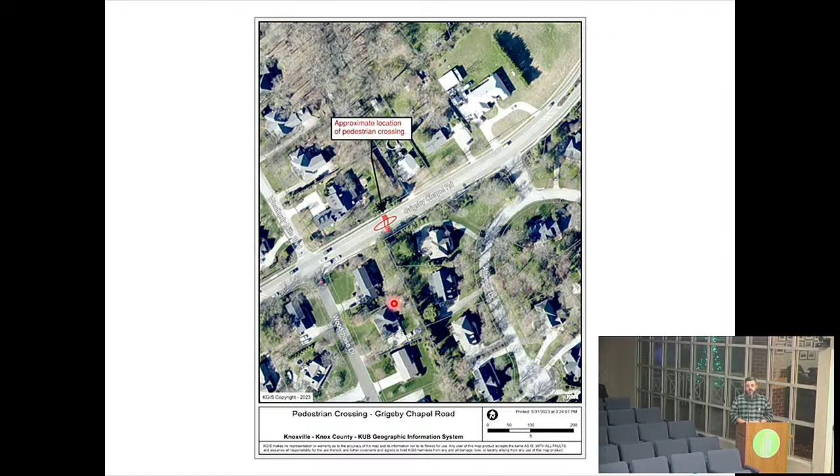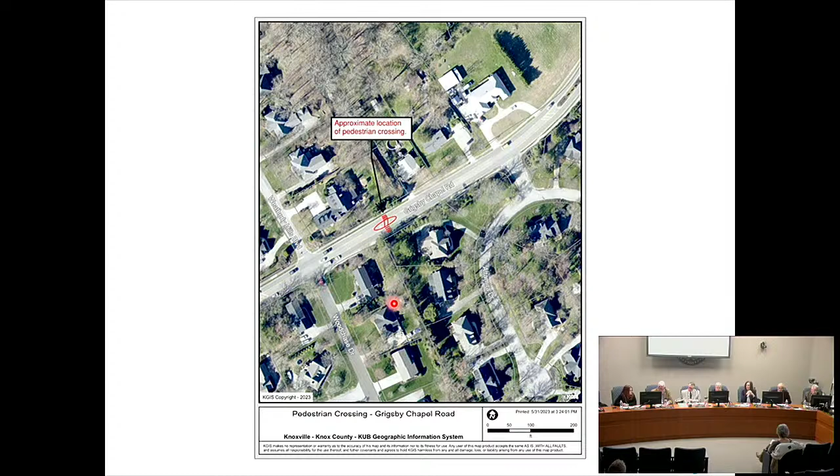So this gives them that opportunity to access the greenways there. Yep, and it'll function just the same as the one further east near Campbell Station Road. You push the pedestrian push button, and you get the flashing beacon to alert drivers on Grigsby Chapel that somebody is crossing. That's been very helpful. The problem wasn't always the first car stopping, it was the cars after it not realizing why that car was stopped. With those lights, it helps drivers recognize that someone's in that crosswalk. And we're seeing that one used a lot more up there by Campbell Station.

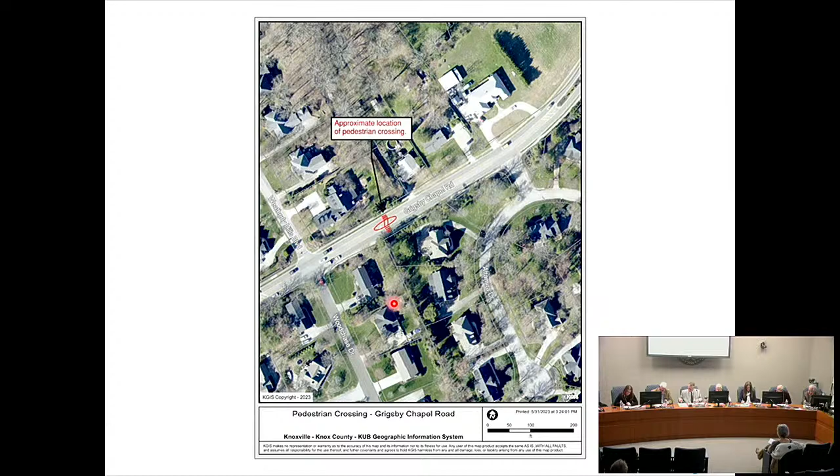That's great, exciting. Yeah, I was involved a few years ago with the retrofit to the flashing beacon on that one as well, so that's great to hear. Okay, that's all I had. Do any of the other commissioners have any questions for Wesley? Okay Mark, I guess we can move on to McFee Road.

Yeah, we've got a few slides on this if we need them. McFee Road is a two-lane road, as y'all know. On this one, there's not a refuge island proposed, it's just a longitudinal kind of striping crosswalk. This one will have flashing beacons. It's about 200 feet north of the north entrance to McFee Park. Due to the proximity to the park, it felt like this location was a good spot for people on the walking trail on the east side of McFee to cross over and get to the park.

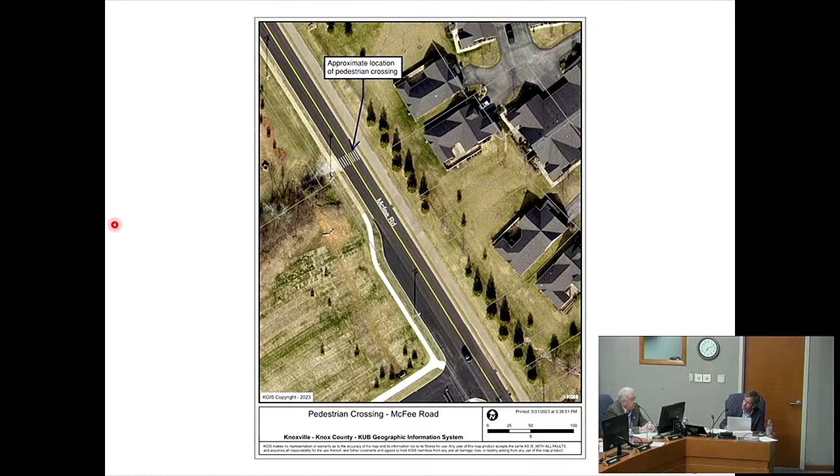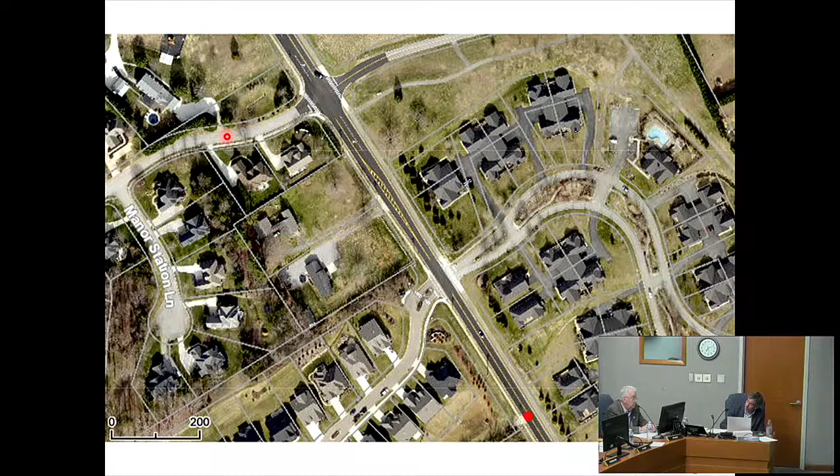This shows a little bit larger area. Now, the actual proposed crossing is right here. But what this shows is to the north, you've got Brass Lantern and the cottages at Price Farm, then all the way up to Evans Road and McFee Manor. So this particular location is centered between Brass Lantern and the north entrance to McFee Park. It's right here where the red dot is.

So again, it's pretty much a straightaway. The sight distance is very good in this location. Due to the width of the road, two 12-foot lanes, there's not enough physical space to incorporate a refuge island. Like Wesley was saying, you need at least 8 feet, and that would make the lanes, unless you redid the road entirely through there, too narrow through that particular section.

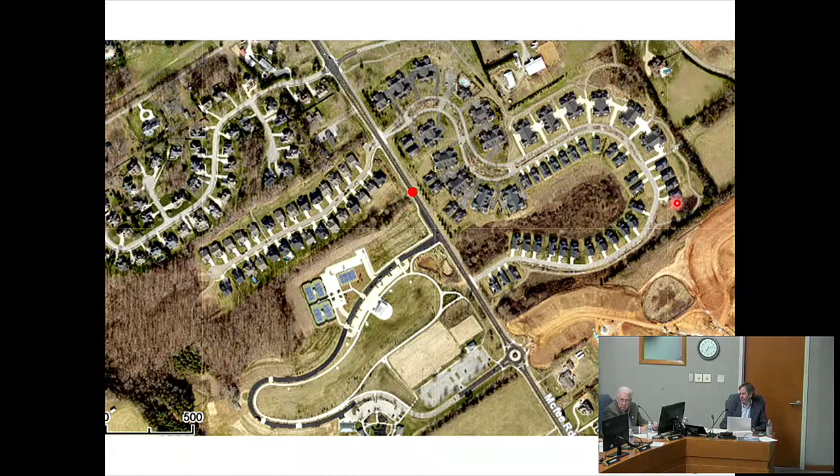I'm just going to add this so the Planning Commission recognizes. First off, this was approved during our fiscal year 2022-2023 budget, so May of 22 is when these were approved. We have a lot of capital projects active — I think the last time I looked, we had like 31 active capital projects. So it takes some time to get to all of these.

But since this was approved, the residents of McFee Road had brought in a petition for the Board of Mayor and Aldermen's consideration this past July. As we all know, McFee Road can be quite a racetrack, and they're looking for solutions for traffic calming, which is a challenge on that road. Of course, this was already in the hopper, and we were working on this. This is more about pedestrian safety.

I have talked with Darrell, and I understand that this would be a capital project, but the possibility in the future of looking at how this works, and if we feel like we need to install a pedestrian refuge island, that would be a construction, because you'd have to widen the road. And you'd have to taper out McFee Road at an appropriate taper width for drivers at the design speed, to be able to shift them over, get them to the side of it, and shift them back into the existing alignment.

And with the fact that you've got that left-hand turn lane there, that kind of complicates things. But certainly something that I would be willing to entertain in the future, but we know that it's a capital project, and of course, looking at what our other opportunities are.

I just wanted to let you all know that there's a bigger thing going on here. We're looking at the speed and the whole corridor, trying to study it to see if there are other options for how to manage the speed on that road, because in this particular area, it's at the 85th percentile, about 43 or 44 miles per hour, which you can see how close the pedestrian facilities are to cars traveling way too fast for that. So that's a concern all the way up and down McFee Road, and we are working on getting data so that we can move forward with some ideas.

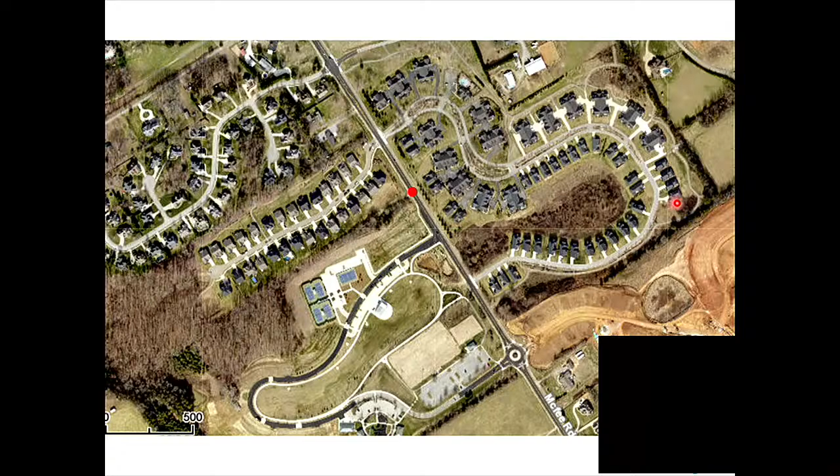Okay. I do have one citizen signed up to speak. Who do we have signed up? It's George Ellis. Do you want to speak, George? Mr. Ellis, I'm going to decline, I think it's been covered by Mrs. Paulman. And you're satisfied with that, Mr. Ellis? Thank you.

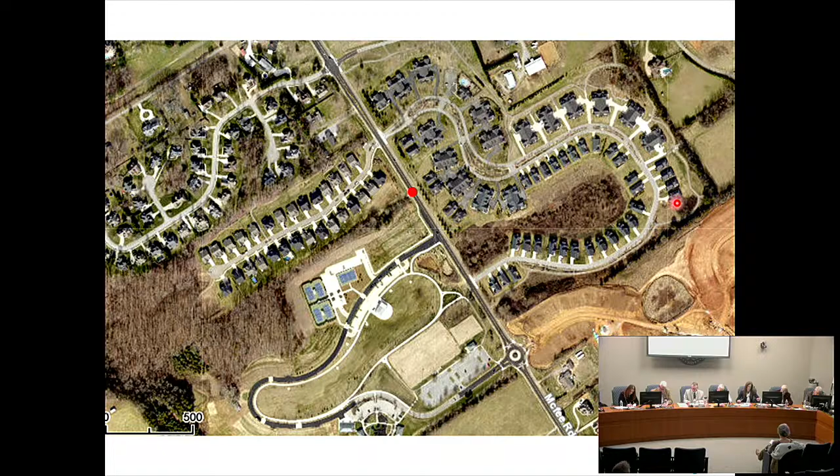Okay, with discussion closed, we'll need a motion to approve the pedestrian crossings for both Grigsby Chapel and McFee Road. Move for approval. Second. With a second, I'll ask all those in favor say yes. Yes. No no's. Let the record show the pedestrian crossings at Grigsby Chapel Road and McFee Road are approved unanimously. Thank you all. Thank you, Wesley.

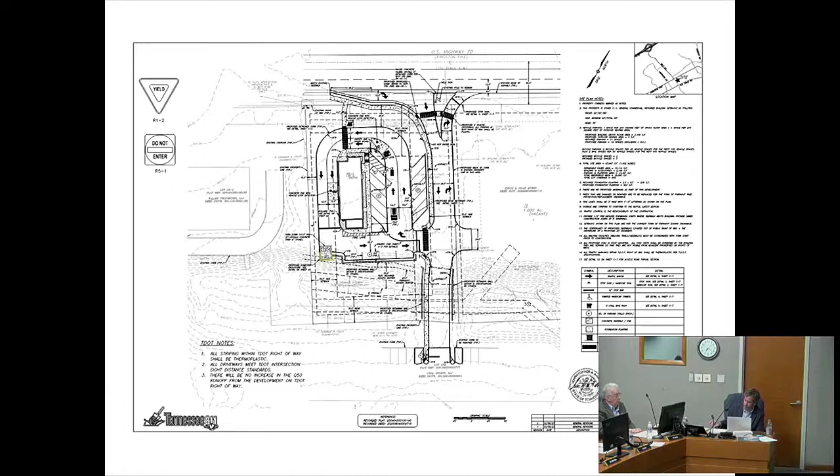As far as other site components, most of the parking lot will be permeable pavers. There's no detention basin, so that is being used to accommodate the stormwater and also meet the town's low impact development requirement. They are slightly underparked for a restaurant, but the ratio for a restaurant is really geared toward a sit-down establishment. This would really be geared toward mostly drive-through. The vast majority of people coming here are going to be going through the drive-through; most of the parking would be probably for employees. So staff is okay with having a few spaces under the requirement in this case, based on the nature of this particular restaurant.

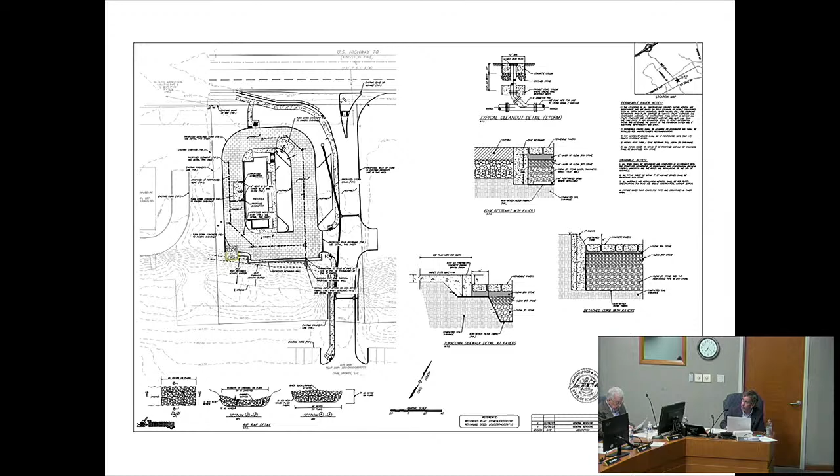The building itself is mostly brick, about 77%. It's thin brick that will be mortared in place to meet the town's requirements for masonry and architectural design standards. So that's an overview of what they're proposing, and staff recommends approval of the site plan subject to the 2 comments included with the staff recommendations.

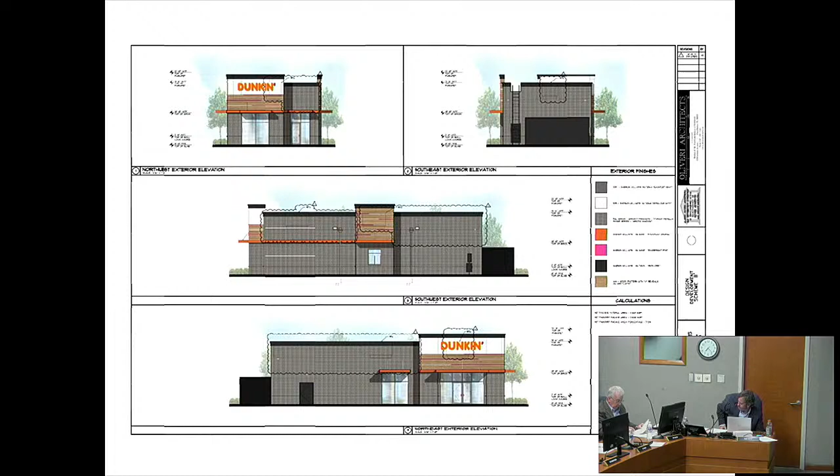Okay, before we move on to discussion, based on the staff information you've provided, Mark, could we have a motion? Move to approve subject to the two conditions. Do we have a second? Second.

Okay, with a second on the floor, Mark, are there any persons signed up to comment on this item? No, sir. Okay, do we have a representative from Urban Engineering?

Good evening, Chris Sharp, 10330 Hardin Valley Road. Hello, Chris. Good evening. Whatever time it is. I hope it's not morning. I was thinking about donuts.

We don't have any issue with it, with the comments. Okay. Vice Mayor Povlin, would you like to open discussion?

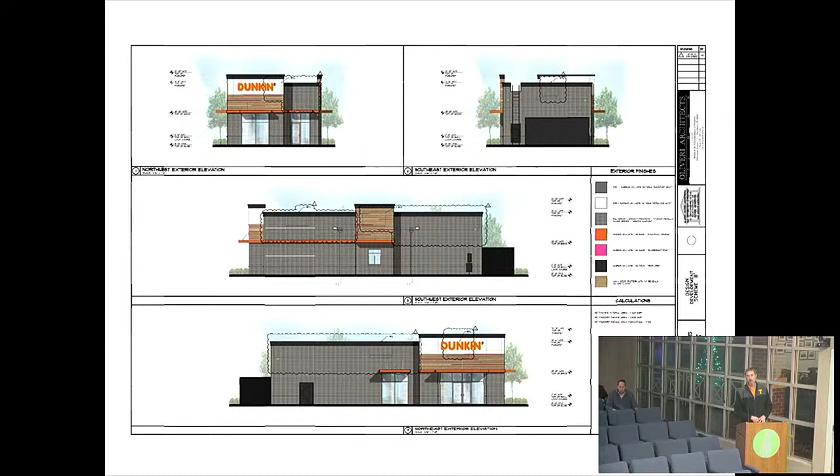I have a real quick question. If they could gain access to cross-access to Dixie Lee next door, where would it be? Can you point that out? Yeah, it would be right here. That's what I thought. All right, right in there. You might square that off and then have a stop sign or something? Yeah, okay, thank you.

Chris, are you having open discussions with Dixie Lee right now, or have you been able to contact them? It didn't go anywhere. Okay. Cool Sports was very receptive, and we met with them earlier this week, and it was great, so I think it's mutually beneficial to both parties. So I don't know why, but the Dixie Lee access is a no-go as of now, unless something changes. Well, that's unfortunate.

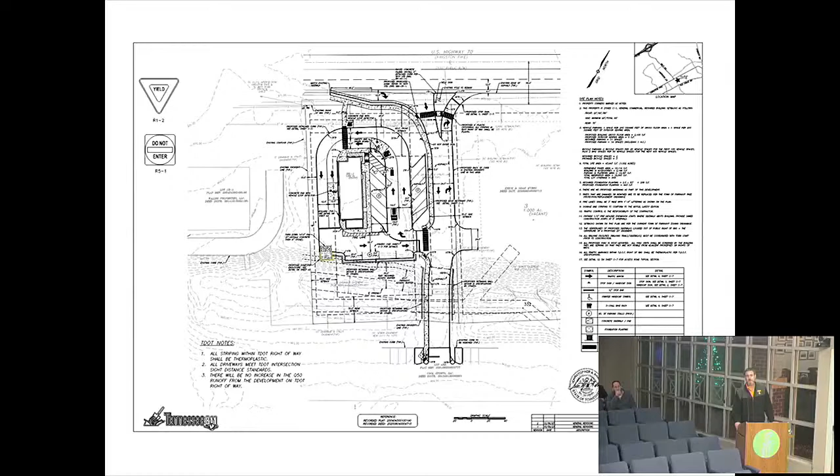Well, at least they have access to a sidewalk that's extending back there into Cool Sports, correct? Correct. Yeah, that's going to be nice for the people there. Getting that sidewalk was very important to me because a lot of people at Cool Sports would just walk up there, and that's what we talked about the other day. Yeah, it'd be great for them, I would think.

I have a question, I'm a little concerned. It looks like you have seating for 16 people, and yet you've got 14 parking spots. Some of those are going to be for employees. Do you feel okay with that? Is that what you're selling us? I do, and more importantly, Dunkin' seems comfortable with that. Okay, at least their developer seems comfortable with that. I was just concerned for y'all, make sure you're okay, and that's based on other similar type restaurants that are predominantly drive-through, so, okay.

Commissioner Pinchuk, we had some discussion about that at the VRRB too, when they brought the landscape plan, and there's some discussion about parking. Again, I think like you said, this is going to be more of a drive-through Dunkin' Donuts than a pull-in, sit-down type restaurant. I'm satisfied with it.

Well, and people come in and they come in and they leave pretty quickly. Yeah, it's not like they stay there. You've got to be like a Starbucks or a Panera. You look at Dunkin', number one, that's what they do. They come in, get their donuts and their coffee, and go right back out. When I was in the commercial world, I used to have a lot of meetings in these type of places, so just want to make sure you're all okay.

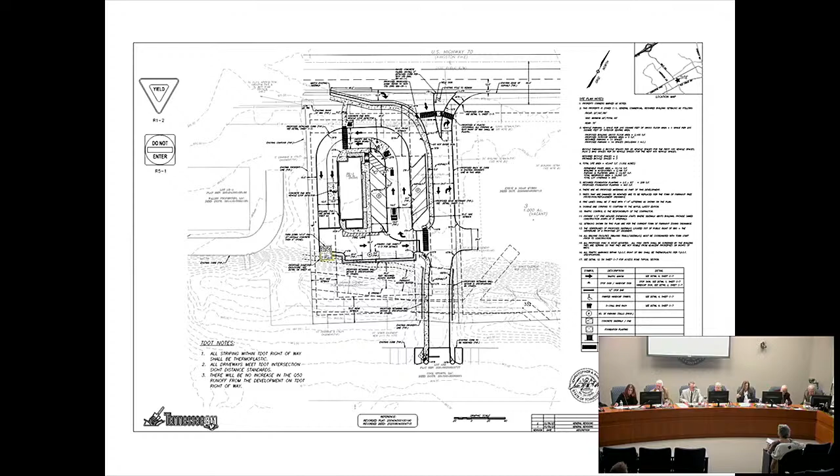Do any other commissioners have any comments or questions they'd like to add? Okay, with discussion closed, and we have a motion and a second on the floor with the subject two's. All those in favor say yes. Yes. Noes? No noes. Let the record show agenda item number 4 for Dunkin' Donuts site plan has been approved unanimously.

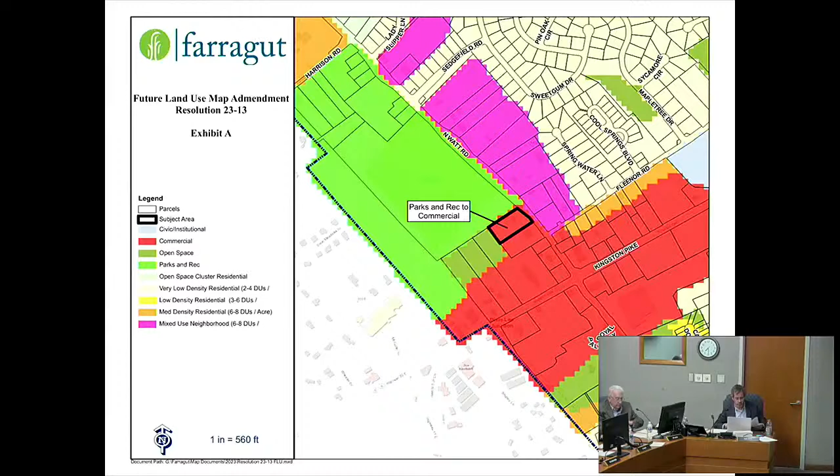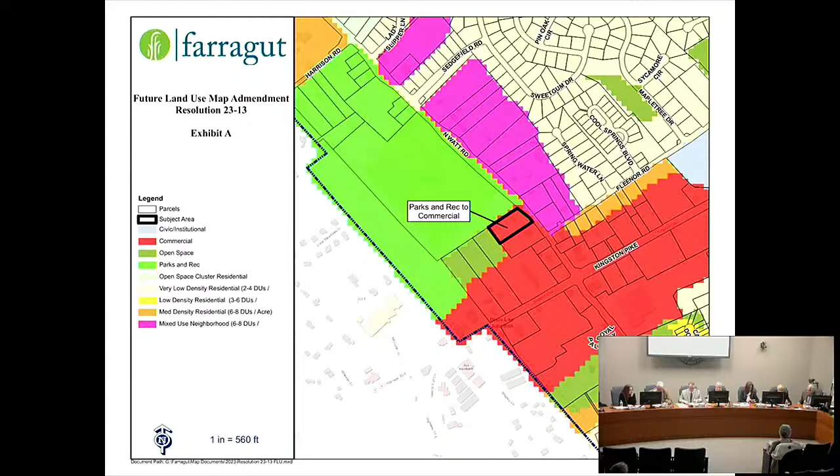Okay, consistent with what we've talked about before. Yeah, that's been good. Okay, go to the next one then.

Agenda item number 6, discussion and public hearing on request to rezone the property located at 209 Watt Road from R1 to C1, 1.7 acres. Deborah Wilkerson, applicant. Yeah, and we talked about this last month.

It involves about a 1.7 acre tract just south of Mayor Bob Leonard Park on North Watt Road. It's currently zoned rural residential. The applicant is requesting to rezone it to general commercial. There are 2 existing homes and some accessory structures on the property. As you can see on the map, the property is mostly surrounded by general commercial, to the west and south, and also on the east side of Watt Road.

So the requested rezoning, the staff is in support of this, and it is reflected in ordinance 23-20, and staff recommends approval of this rezoning request as expressed in resolution PC-23-14.

Okay, before we open up discussion for PC-23-14, is there a motion on the floor to approve? Move to approve. And with a second, I'll open up discussion. Vice Mayor Povlin, do you have anything you'd like to add? Nothing. Mayor Williams, do any other commissioners have any comments or questions?

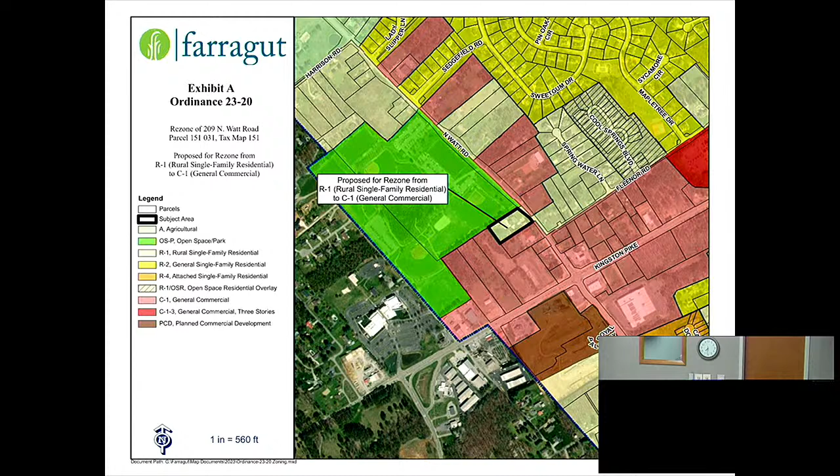There's a plat note in there. Didn't we put a plat note on there that wasn't required if the zoning was changed or something? Yeah, so this should nullify that. But the ordinance was also changed to give the planning commission that ability should it be needed. So that should take care of what they're requesting, yeah.

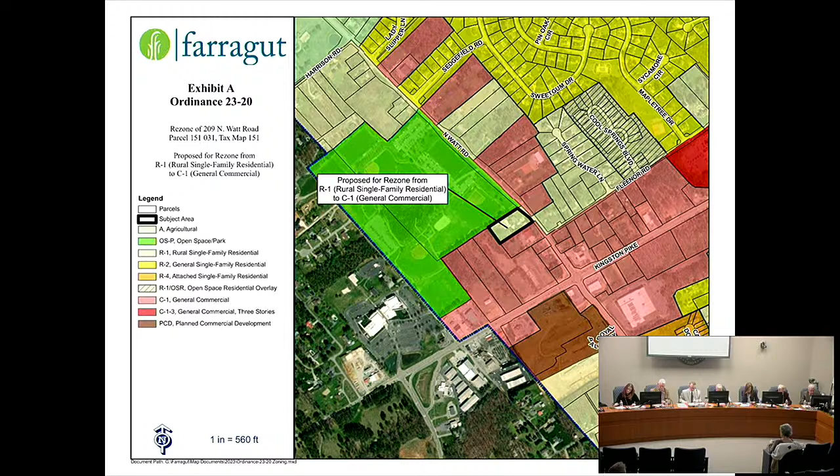Anything else? Okay, I believe that closes discussion. Mark, because this is a resolution, do we do roll call votes on all resolutions? No, not as far as. Voice vote is good? Okay, with the motion seconded on the floor, I'll ask if the motion stands as presented. And I believe it does. Yes. I'll ask that all those in favor say yes. Yes. Noes? No noes. Let the record show that Resolution PC-23-14 is approved unanimously.

Agenda item number 7, request for approval for the installation of 1,026 linear feet of 2-inch gas line along a portion of Kingston Pike and Federal Boulevard for KUB. KUB applicant. Yeah, this item as mentioned in the caption is a little over 1,000 linear feet of new 2-inch plastic gas main line.

Initially it'll start out at Kingston Pike. It's this red line here on the screen, a little bit hard to see. And run along the east side of the Chamber of Commerce property, then go back to the east, and run along the west side of Federal, tying into Farragut Crossing Drive in the Farragut Crossing subdivision.

So most of this will be directional boring. There'll be a couple of places where they'll have to do some open cuts to tie in the line with the tie-ins and tie-outs, and that's pretty typical, frankly, with most utility projects. So it's pretty straightforward, but the staff recommends approval of this utility-related project.

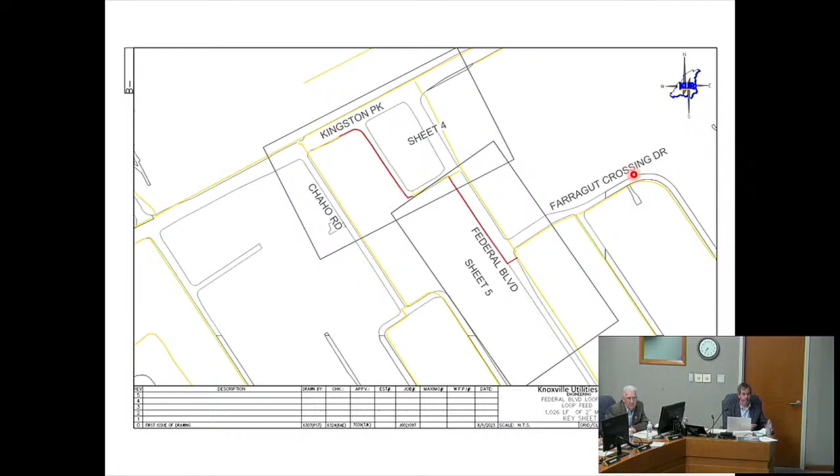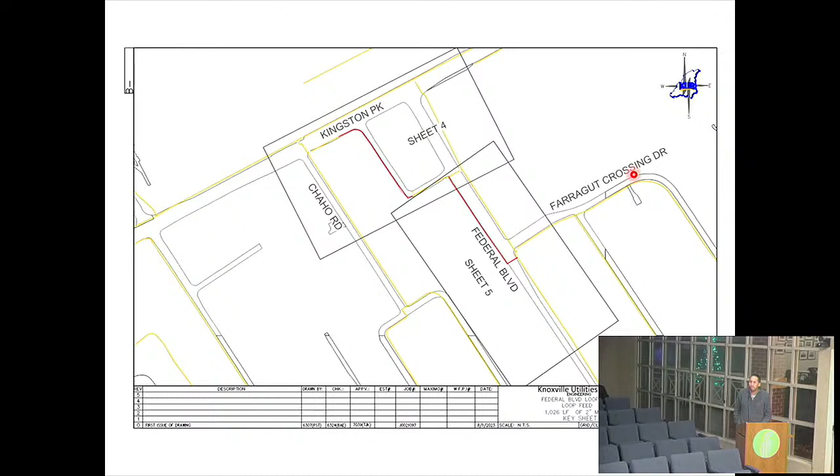Why is it needed? Really, it's just needed to increase the reliability of our system, to provide reliability to our gas customers, so that we continue to analyze our system and look for where we have weak points, where one thing could happen and affect a lot of customers. So adding this extra feed just makes our system stronger. So it's not replacing something that's defective or damaged? Correct, it's just making it stronger.

Stronger. Okay, before we continue, could I please have your name and your address for the record? My name is Tim Kelly at KUB. Address is 4505 Middlebrook Pike, Knoxville, Tennessee. Thank you, Tim. Appreciate it.

Vice Mayor: How are the affected property owners notified? We're going to be sending out postcards before we start. The postcards are ready to be mailed once this is approved.

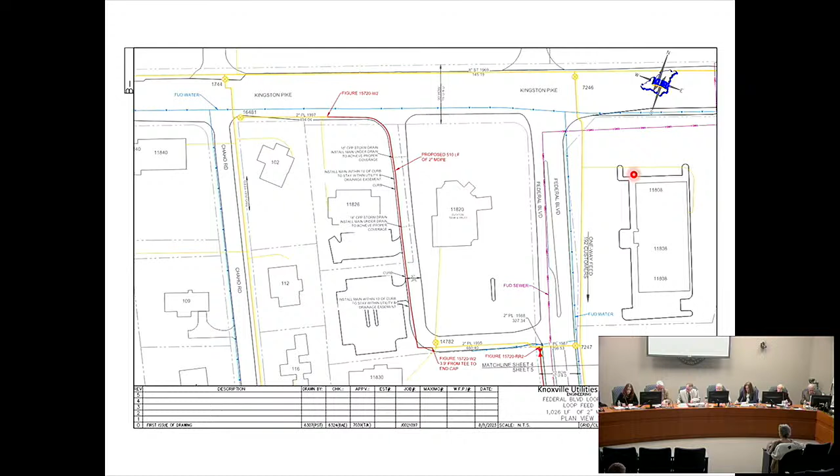Also, if you could give the town of Farragut that information, we could put it out generally on our Nextdoor or our town Facebook page. That way, if they don't see the postcard, they may see a social media post. Thank you. And typically, our communications department may also do that duplicate notification. We use Nextdoor to notify people and put things on Facebook when those things come up.

That would be helpful. Is everybody satisfied? Yes. We have a motion and a second on the floor, subject to the two conditions.

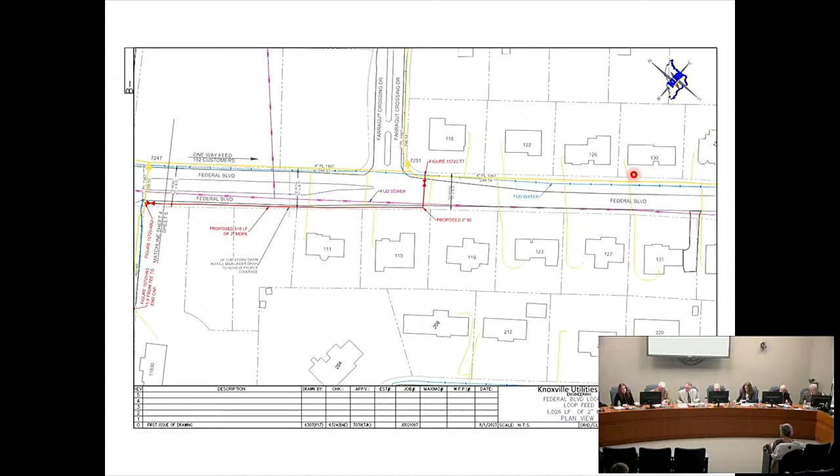I ask that all those in favor say yes. Yes. Yes. Any noes? No noes. Let the record show agenda item number 7 has been approved unanimously.

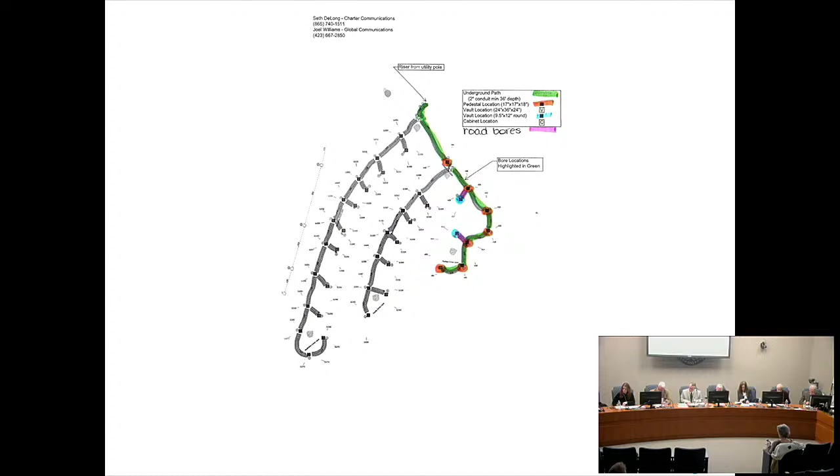I'll ask now, all those in favor with the two conditions subject to, say yes. Yes. Yes. Noes? No noes. Let the record show that the application for installation of new fiber optic lines at the Cove at Turkey Creek is approved unanimously. I'm sorry, I should have asked a few questions.

I'm reaching out to someone who lives in that neighborhood to see if they have a neighborhood email system so residents can be informed. Do we have any idea when they're planning on doing this?

No, I mean, pretty soon, because they put their desired work date before this meeting, but they obviously can't do that. Who can I reach out to on Monday or Tuesday to find out, on staff?

In the engineering department, Teresa. Okay, yeah, thank you. She should be able to help you with that.

Those are handled through the engineering department, all the right-of-way permits. We just bring the main lines through the planning commission as required by state law. They'll handle the permitting and coordination.

I'll reach out to her on Tuesday then.

Agenda item number 8 is closed. Moving on to agenda item number 9, request for approval for the installation of new fiber optic lines for Charter Spectrum along Iron Plow Drive and Wagon Hitch Road in the Grove at Boyd Station subdivision.

Global Communications, applicant. This item involves the same 2-inch fiber optic line conduit for Charter Spectrum. It'll be installed along a short section of Iron Plow Drive in the Grove, and then along one side of the new street they're actually requesting to plat under agenda item 11 at this meeting.

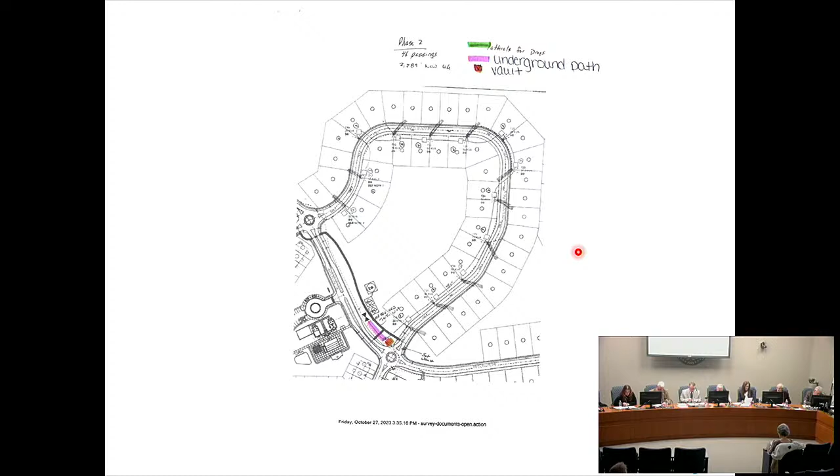Now I ask that all those in favor say yes. Yes. Yes. Noes? No noes. Let the record show that agenda item number 9, request for approval of fiber optic cable installation on Iron Plow Drive and Wagon Hitch Road in the Grove at Boyd Station, has been approved.

Agenda item number 10, request for approval for the installation of a 3-inch low-pressure sewage line along a portion of the west side of Boring Road for purposes of providing sewer service to the residents at 140 and 152 Boring Road.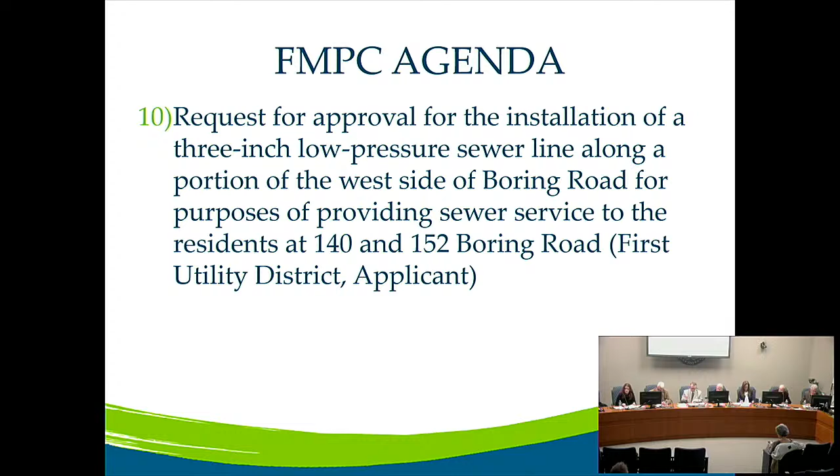First Utility District, applicant. This involves a 3-inch low-pressure sanitary sewer line installed along a portion of Boring Road. It would start in the right-of-way on the old Ingalls property and run along the west side of Boring Road up to where they will bore under Boring Road to access the 2 house lots this is servicing. It's not related to any other development.

It's basically just getting sanitary sewer service to those 2 residential lots. All the work will be conducted using directional boring, and staff recommends approval subject to obtaining the right-of-way permit, including erosion and traffic control measures and inspections, and notifying the affected property owners prior to the work being initiated.

Do we have a motion to approve? Move to approve with the subject conditions. Second.

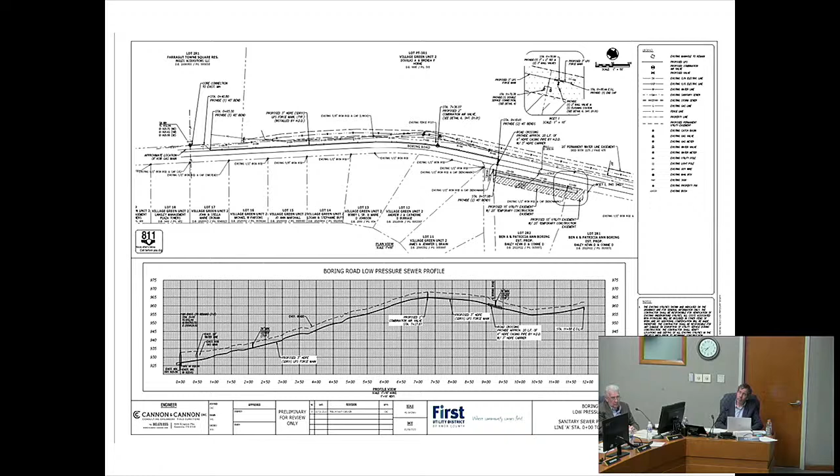Okay, I see the applicant is present. If you would, please state your name and your address for the record. Edwin Deaton, First Utility District, 122 Durwood Road, Knoxville, Tennessee.

Do you have anything you'd like to add? No, I think Mark did a good job covering everything. The only other thing I'd supplement is we've sized it to meet the needs of the neighbors. It's not just going in for the 2 folks who paid the design and construction cost. We've sized it to accommodate their neighbors as well, which will prevent us from coming back and changing the line in the future.

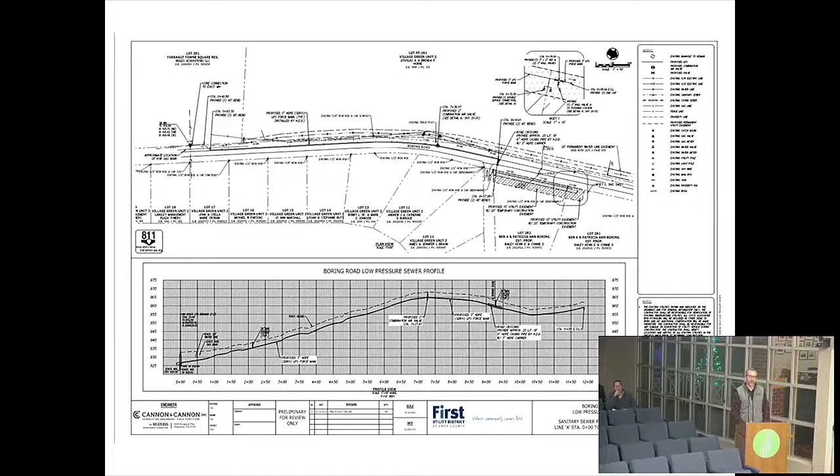I presume there's going to be some more lines added along that line to accommodate the school. That really depends in large part on what Knox County Schools does for site design, where their service points are, and I don't have any control over that. We'll support and serve whatever they build, and they'll accommodate any infrastructure improvements necessary to serve their use, whether that's water line extension or sewer line improvements.

But we've conservatively sized this for 3 units an acre growth for the available land back there. Depending on what we have from the school, I still think it's reasonable they could be served through this line as well. Okay, thank you.

There's potential development, that big 60 acres back there that Village Green surrounds, coming off of Boring Road. And I suspect there's a bunch of ways you could get there. Yeah, there is necessarily gravity sewer back there, and if anything were to happen, that's likely to cause some other improvements on the gravity lines downstream of them.

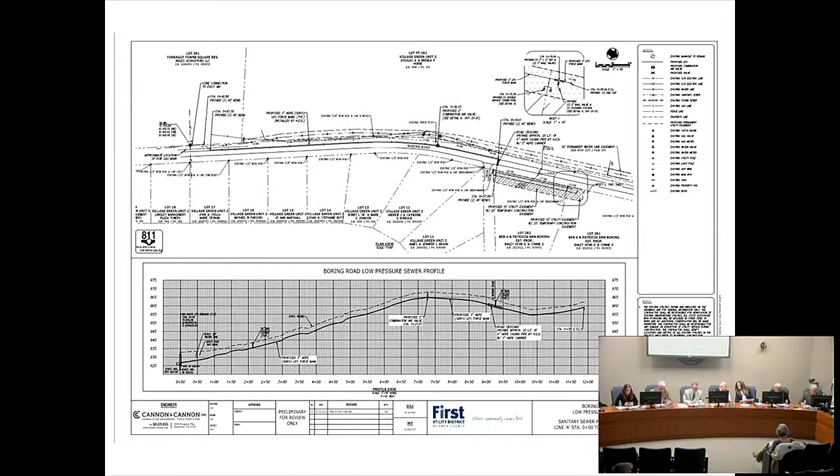Agenda item number 11, discussion and public hearing on approval for final plat of Phase 1, Unit 3 of the Grove at Boyd Station subdivision, 25.73 acres, 46 lots, Lynch Surveys, applicant.

Yeah, this is the next unit of the Grove, Boyd Station, McFee and Boyd Station Road. This was actually northeast of the previous unit that was platted, which was attached single family. As you've been in there, you can see the townhomes are being constructed. This is northeast of that, and these will be single family detached lots.

There's 46 lots here in roughly 26 acres. There's about a 6-acre open space in the middle of this area, which is a great benefit to all these house lots because they get to back up to it. There's also a walking trail section constructed along a portion of this open space.

That ties into the overall pedestrian network of this development. So the staff recommends approval of this final plat, subject to 3 comments: obtaining the required signatures, some field-related punch list items they're working on, and completion and maintenance letters of credit, for which town staff will need to come up with amounts. With those subject-tos, the staff recommends approval of the plat.

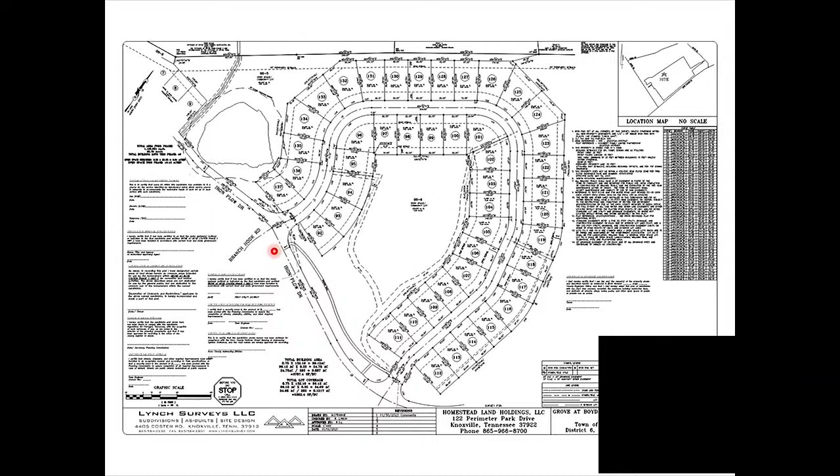They had a handful of minor, relatively minor things on the punch list for Daryl to be able to sign the plat. There are some other items they'll need to work with us on regarding some of the pavement in there, but that would be something they'd need to address when it warms up.

Yeah, what do we do with ground cover this time of year? Well, that's another thing Thomas and those guys have been trying to work on. We had an excessive drought, so they went in and tried to hydroseed the site, which is a pretty big undertaking, a lot of area. Then, after the last application of hydroseed, we had a really good rain, which we needed, but it was heavy and washed a lot of that away. So we've gone back and forth, with a mountain of straw and seed they've been trying to work with. It's a challenge, especially this time of year.

It'll mostly be a rye mixture, just a temporary cover that'll come in, and they'll potentially have to supplement that later in the spring with additional grass. Does that pose a runoff risk if we get rains in the spring? That's something we'll watch with them, focusing on areas that need a uniform stand of cover where you won't be disturbing things, usually the open space areas, trying to get the rights-of-way in the periphery stabilized, along with drainage ways, especially where those are already graded as needed. Those are our focus areas. They've also got a topsoil stockpile area we didn't make them stabilize, since they'll be taking that off and using it frequently, so it didn't make sense to grow grass on something that's going to be removed.

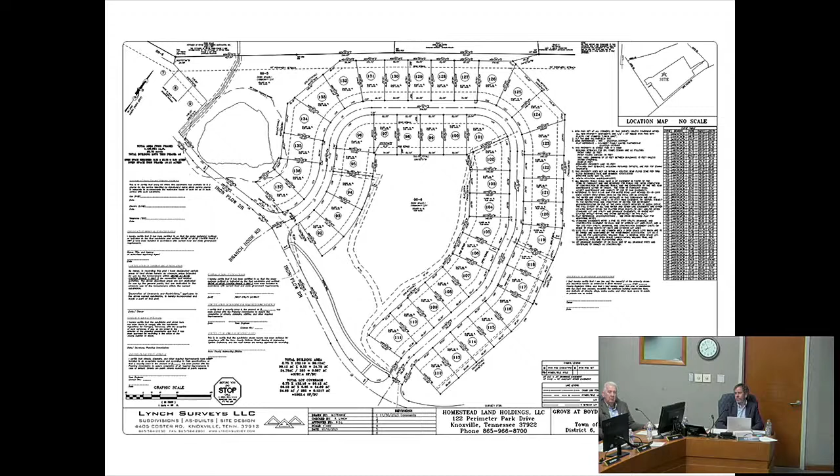Those two drainage easement areas are swales that come down, and once the head walls and pipe outfalls were installed, we went in and matted those early on, so we have pretty good grass growth in the swales themselves, which helps with controlling erosion. We've also installed some additional check dams to help catch sediment until that open space pops up.

Even though a lot of the hydroseed seemed to have floated and moved around, it seems like the seed stayed in place, because even what looks like bare ground right now has germination throughout it. So we were happy to see that - it wasn't a total loss.

To Mark's earlier point, after hydroseeding 25 acres, which is quite an undertaking, we went back and recovered at least 75% of it with straw, crimped in so we had something working for us as stabilization until we get germination on the pads. The pads are probably about two weeks behind the open space from when the seed went down, so we're hoping for enough warm afternoons to help those pads pop up in the next couple of weeks.

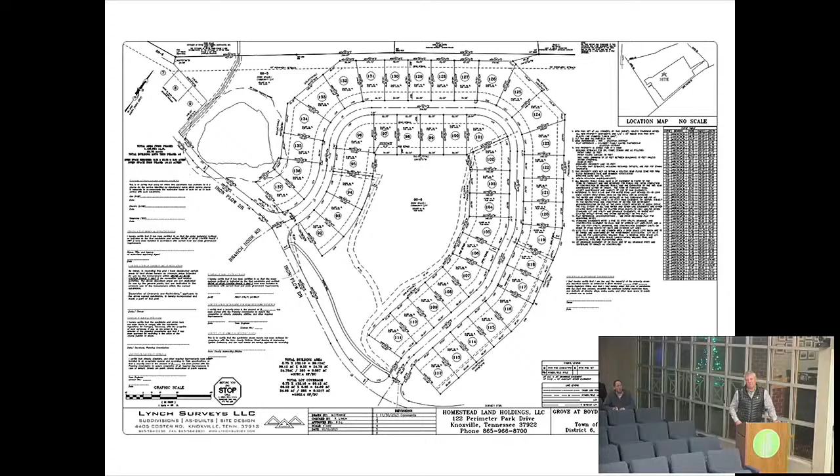Is your intention to leave that open space as grass when it's done, or will you plant trees? As of right now the intent is to leave it as a field, a usable area. The drainage easement that splits the open space, between the walking trail and that easement, was graded out to be a big flat pad. It could be a soccer field or something else in the future if we end up adding it for the community or the community decides to add it. From that drainage easement it slopes up, but then flattens out pretty well, so the majority of that open space is usable as open field right now, which is a really nice asset.

It's a rare amenity. That's nice - they have a big backyard they don't have to mow. That's right, it's a good amenity.

Do any of the other commissioners have questions for the applicant? Everybody satisfied? We have a motion that's been seconded on the floor with subject-tos. All those in favor say yes. Yes, yes. Noes? No noes. Let the record show that agenda item 11, approval for final plat of Phase 1, Unit 3 of the Grove at Boyd Station subdivision, has been approved. Thank you, Thomas, appreciate your time. Thank you, Commissioner, appreciate it.

Mark, do we have any utilities for approval? No, none other than what we've already looked at. Do we have anybody else signed up for public comment? No, sir.